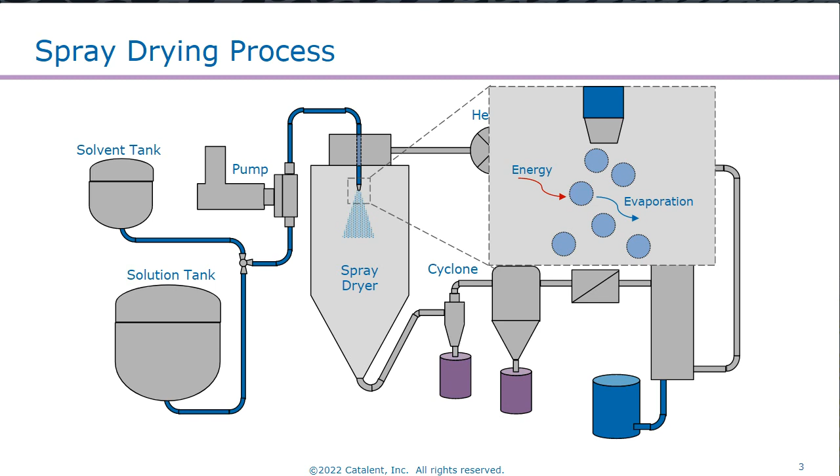Thinking about the early phase of development. In general, in this phase, companies are looking to achieve suitable exposure of their drug in initially tox studies and subsequently clinical studies. We want to assess the safety of the drug, getting up to potentially quite high doses. We want to see some initial signs of efficacy, and often a big driver is to get to the clinic quickly and with limited API.

So if we're developing a spray-dried amorphous solid dispersion presentation for the drug in this phase, some of the considerations here: the SDD is often being used to improve the solubility of a poorly soluble drug, and through that improvement in solubility, it's driving the improvement in bioavailability to help achieve the exposure in tox and in the clinic. In order to do so, we need to identify drug polymer combinations that provide the enhanced dissolution, so that we are getting that improved bioavailability.

We also need good physical stability for the drug polymer combination, and ideally we want to be operating at a high drug load. The higher the drug load, the smaller the dose will be for a higher dose of drug.

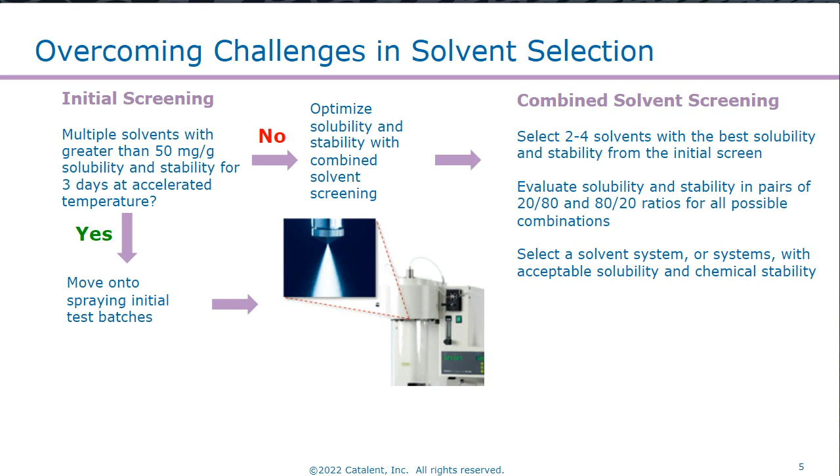So from the initial screening, we'll look at a few of the solvents that are showing the best promise, and start to look at combinations of those solvents, potentially 80-20, 20-80 ratios. And then when we find a system that does have acceptable solubility, we can then proceed with the initial spray drying.

Some of the common solvents that we'd be looking at here: we're often using alcohols, so methanol, ethanol, isopropanol, often ketones, so acetone, methyl ethyl ketone, methyl isobutyl ketone. Chlorinated solvents such as dichloromethane have great utility here. They're often very good at solubilizing both the drug and the polymers that we're working with, and then sometimes solvents like ethyl acetate.

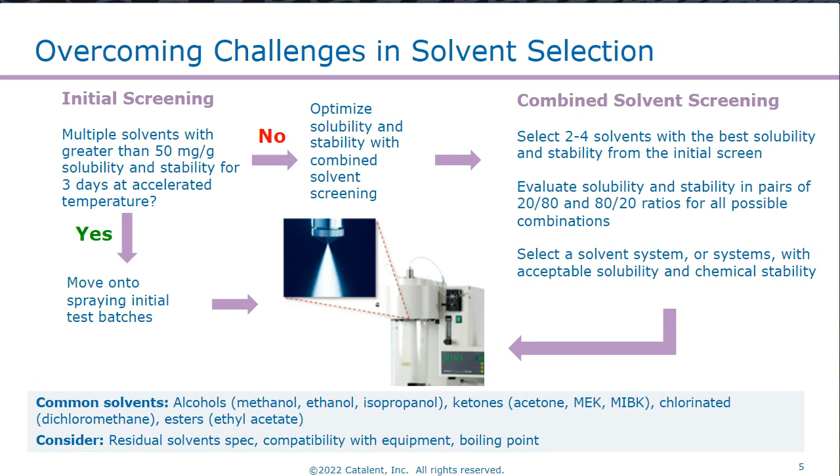Key considerations in the solvent selection are thinking about the residual solvent spec that we're going to need to meet for the finished product, which of course is related to the toxicity and tolerability of the solvent. We also need to consider the compatibility of the solvent with the spray drying equipment. Some of the more aggressive solvents that we may look at to dissolve the API may also be very good at dissolving some of the seals that we have in the spray drying equipment. And of course, the boiling point of the solvent will also be important when we're establishing the spray drying conditions that we're going to be using.

So that covers where we go with the solvent. The other part of the solid dispersion is the polymer. So some approaches that we take to determine which polymer we're going to be using: there's broadly two aspects that we need to consider.

The first part, we need a polymer that is going to be stabilizing the amorphous state of the API, because we're normally using the amorphous state of the API to improve solubility to get the bioavailability enhancement. So one of the first parts of the screening is to look at combinations of the drug with different polymers at different drug loadings to see which combinations can produce amorphous films, and then through stressing those on stability, which of those can remain amorphous on storage.

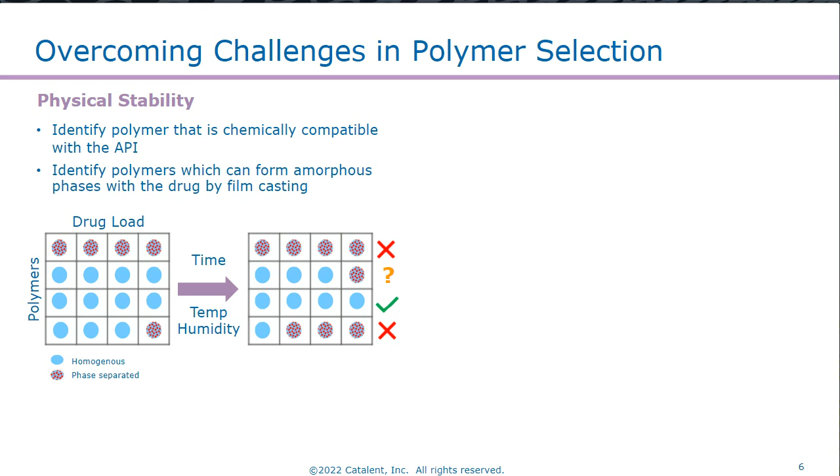The other important aspect is whether the polymer can maintain the supersaturation of the drug following dissolution. In other words, when the solid dispersion releases the drug on ingestion in the intestine, which polymer will maintain the solubility of the drug at an elevated level.

There's a screen we use routinely here, a liquid-liquid phase separation screen, using fiber optic microdissolution equipment. In the dissolution medium we have the polymer pre-dissolved at a known level. We then titrate the drug into the dissolution medium, dissolved in a water-miscible organic solvent at a high concentration, and through monitoring the UV response and scatter of the UV trace, we can determine when the drug comes out of solution.

By identifying where that separation occurs, we can determine how much polymer is required to maintain the drug in solution. From a combination of those two experiments, we can determine which polymers at which drug loads are going to be physically stable, and which are going to maintain the supersaturation. So we can identify which of the polymers are worth spray drying.

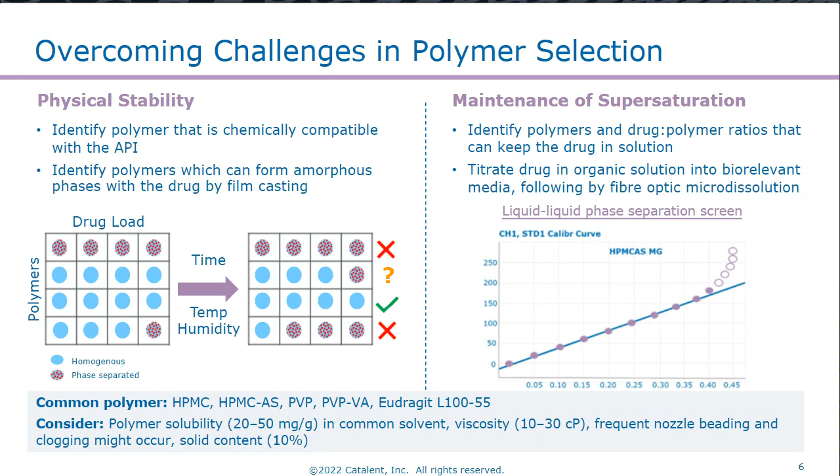So that gives us the initial leads that we would be considering in the lab. Through preparing some of those via small-scale spray drying and characterizing the solid dispersions, we'll select which of the solid spray dried dispersions we're going to scale up for phase 1 clinical supply.

At the lab scale we would determine the solids content, and then through the use of a single spray solution preparation, we would explore different process parameters such as the inlet and outlet temperature, the choice of nozzle, the atomization pressure, the feed rate, and the interrelationship between these parameters. This gives us an idea of the processing parameters we need to operate with for these initial clinical manufactures.

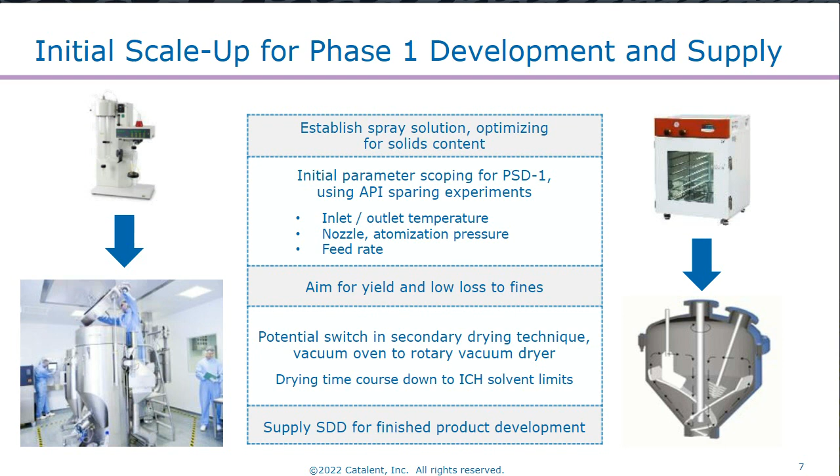As we transition from early phase clinical manufacturing into late phase with an eye on commercialization, three common goals tend to crop up with project teams. The obvious one is we need to increase production capacity. Along with that often comes the need to optimize critical quality attributes to make the best finished product dosage we can. And as we get ready for increased regulatory scrutiny, we need to find and manage sources of risk within our product and process.

Three ways we look at doing this: use science and experience-driven scale-up methodologies, useful for scale-up, de-risking scale-up, and for better troubleshooting when things go wrong during manufacture. At this stage we also need to start linking material attributes and process parameters directly to the product quality attributes we desire. Throughout all of this, we should be doing risk assessments with the whole project team—analytical, QC, operations, and development—to find and manage those sources of risk.

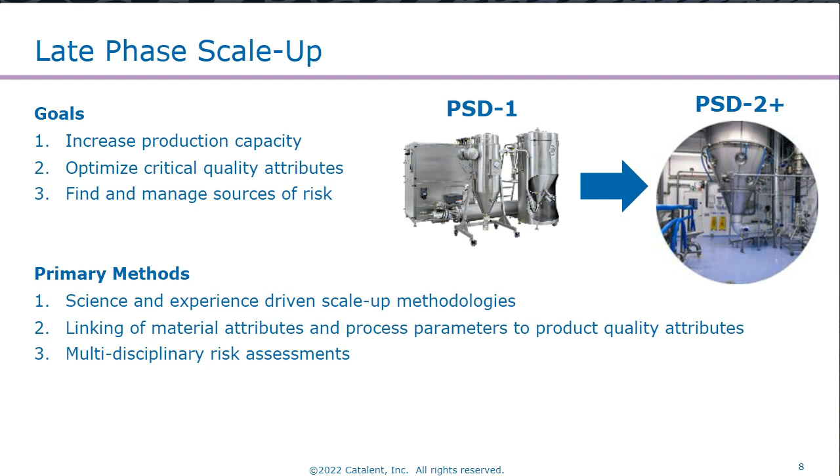It's helpful to have an understanding of the scale of dryers we're looking at. Early feasibility studies are often done with rather small dryers—your Büchis or your ProCepTs. The gas flow is slow, and they're typically run in open loop, meaning we don't recycle the nitrogen during spray drying. We have drier processes overall. These are also done with two fluid nozzles, where we have limited particle size tunability.

You'll often have very fine particles, and you need to be careful to ensure those are dry before they impact on the surface. As we move into phase 1 and pilot scale batches, it's often a time where we transition into closed loop recycle nitrogen, so we need to keep an eye on how that impacts the relative saturation of solvents at our dryer outlet. We're also switching to high pressure nozzles, so we have to be careful about how we select that nozzle to ensure we're creating droplets of the right size for the particles we want.

Late phase, we're often looking at switching to production or even very large capacity scale spray dryers. These dryers have large drying volumes, which allow us more flexibility with the way we're using our nozzle to create droplets that are larger and dry slower because they have more time until they impact onto the wall of the spray dryer or outlet piping.

It's important to note that spray drying processes done at feasibility scale produce powders highly representative of what you're producing at larger scales. Physical chemical properties of those powders are going to match. Things like your Tg, which is important for the development of oral dispersion products, are going to match if your formulation matches.

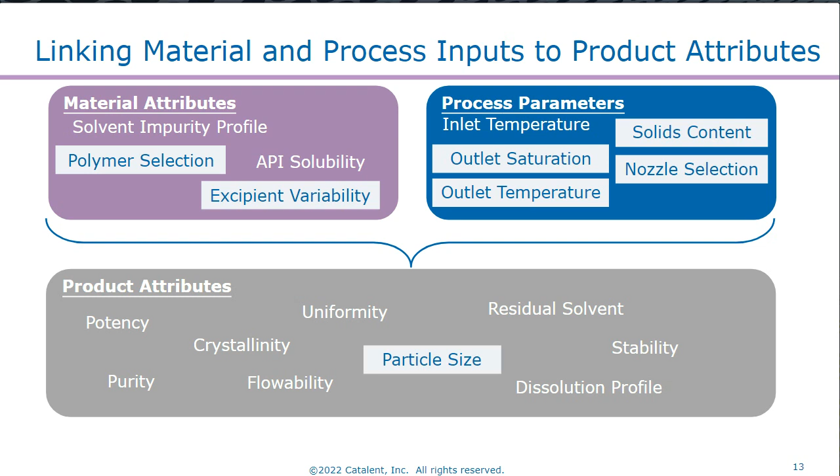In late phase development and troubleshooting, we often need to understand at a really detailed level the way that process parameters impact our product attributes. During early phase, this is accomplished with rules of thumb. Over the experience of spray drying, you learn, and with thermodynamics, understand how changes in process parameters are expected to impact your product attributes. As you develop, you get more product-specific observations from batch to batch.

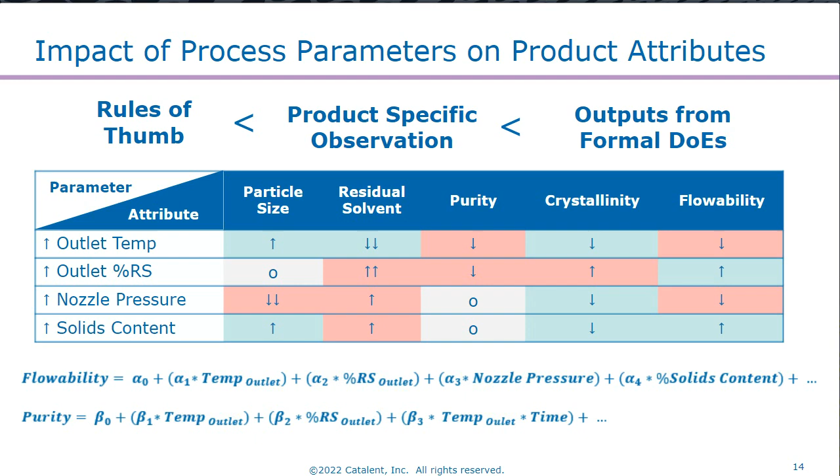Another tool that we often use is risk assessments, and there's two key uses of these. They help us prioritize where to invest our resources, and they can be used as documentation for a quick reference during troubleshooting. This helps both the operations and development team communicate clearly what to look for during these scale-up batches.

The most basic form of risk assessment I like to use is a simple risk ranking, where you look at the severity of a risk and the likelihood of it happening, and that gives you a risk level, which can be used to prioritize where to spend time and how much control we need to have over ensuring that risk doesn't happen. Some high-risk examples would be things like API degradation in solution.

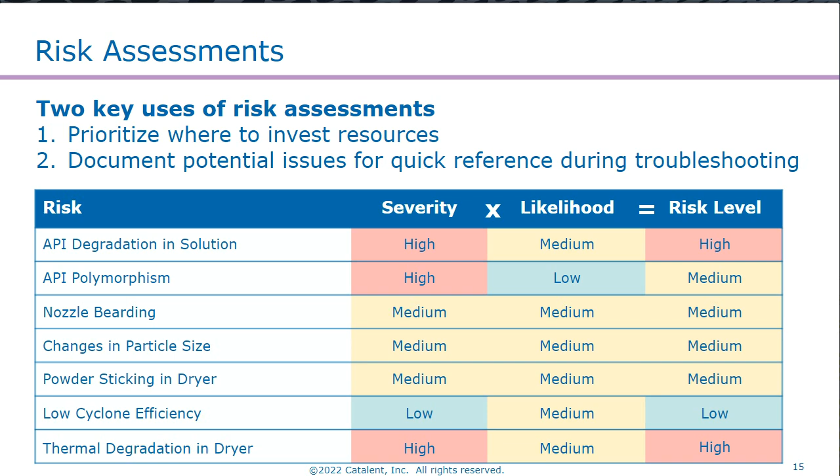This could cause out-of-spec product which couldn't be released, so we need to have a high degree of control over things like this. A lower impact example would be low cyclone efficiency. The severity of this is usually low, provided that we can still meet the clinical supply, and the likelihood is medium. Usually at this phase, we have a good understanding of what is driving our yields, and we can control it. So in this example, we would spend more of our effort making sure our API doesn't degrade in solution versus worrying about our cyclone efficiencies.

Another useful tool during troubleshooting is to create these sorts of troubleshooting guides for project teams and the operations team, where we can have issues, causes, diagnostics, and solutions for these potential issues. So going back to our API degradation in solution example, what are some causes of this? We could have, from early phase, selected a solvent where there is some slight incompatibility with the API.

Perhaps our API is sensitive to hydrolysis reactions, and a solvent blend was selected that contains water. This could have been done at early phase because it was the best option we had available at the time to get the solubility we needed, but it does expose the project to the risk of that hydrolysis reaction. Another couple of potential causes are perhaps as we scale up, there was a change in how the API is exposed to light or oxygen.

Some useful diagnostics for this are clearly our HPLC solution assay and related substances methods. And then we should give our operators and scientists instructions to look for color changes in the solution. That's often a very early sign that something is going on in your solution.

Some ways to address this are really formal solution stability studies. These should be performed throughout product development as we change scales and change the time and conditions we're holding our solution in. Another thing that's often useful to consider for late phase development is changing the way you hold your solution, perhaps looking at holding it at 2 to 8C versus room temperature, particularly if you anticipate long spray drying times and need to be covered against potentially weeks of API in the solution state.

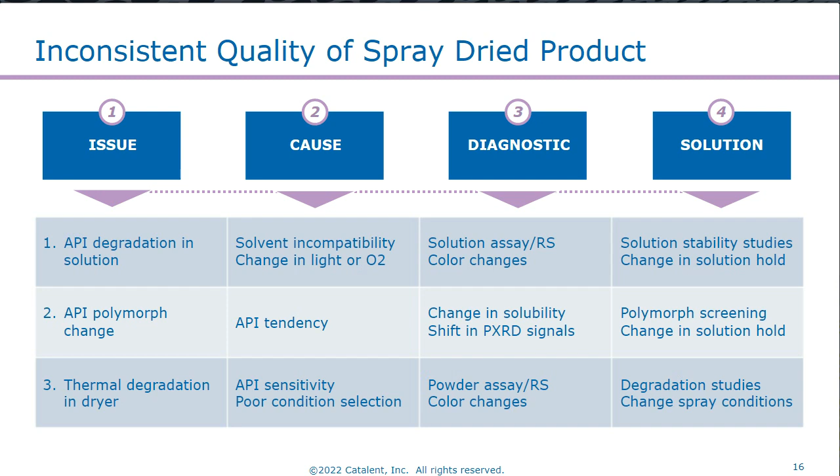Another common set of issues is material processability. Spray-dried powders are known in the industry to have issues with flowability, and that product attribute of the spray-dried intermediate needs to be controlled and troubleshot during scale-up. This poor flowability comes from the generally low bulk density of these materials and the small particle size. The diagnostic of this is physical characterization and then downstream experience.

You need your spray drying team to be in communication with the team developing the solid oral dosage form to understand how impactful this poor flowability is on their ability to produce the material. Some ways we can address this with the spray drying process is to optimize our atomization to create larger droplets, changes in the dryer settings to create denser material, and looking at improving our spray drying solution and perhaps increasing the solids loading if we can.

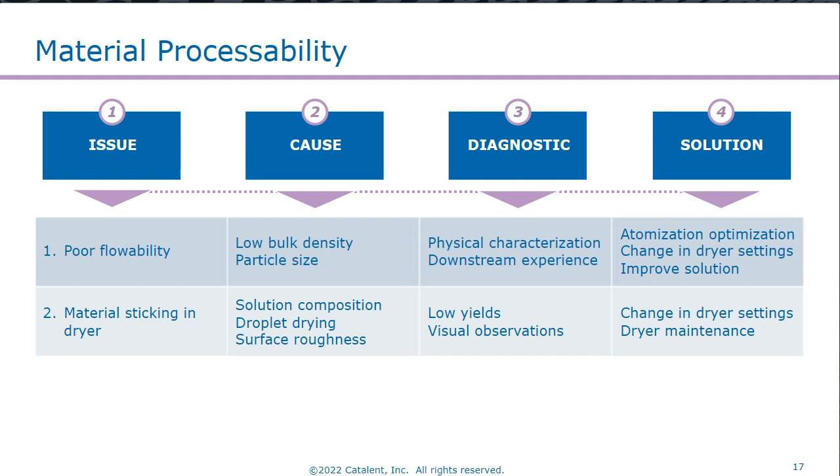Some equipment-driven troubleshooting issues is that low cyclone efficiency. This can be caused by an improperly sized cyclone. Perhaps we're pushing process throughput and we're now operating in a regime that the cyclone wasn't originally designed for. Perhaps we're creating a lot of fine powder. Or one that often creeps up is if you have material sticking on the wall of your chamber, and then if your pneumatic hammers knock that material off, you can clog or overload your cyclone.

Some ways to diagnose this are ensuring you check the design calculations of your cyclone, creating larger droplets to create larger particle sizes. And if you see cyclone clogging, the most common diagnostic for this is you'll have collection container yields of 90%, 90%, and then suddenly you'll have a collection container yield of 50%. This can often be diagnosed by also pressure monitoring around your cyclone. If that pressure drop changes, you know that something has changed in the physics of that cyclone.

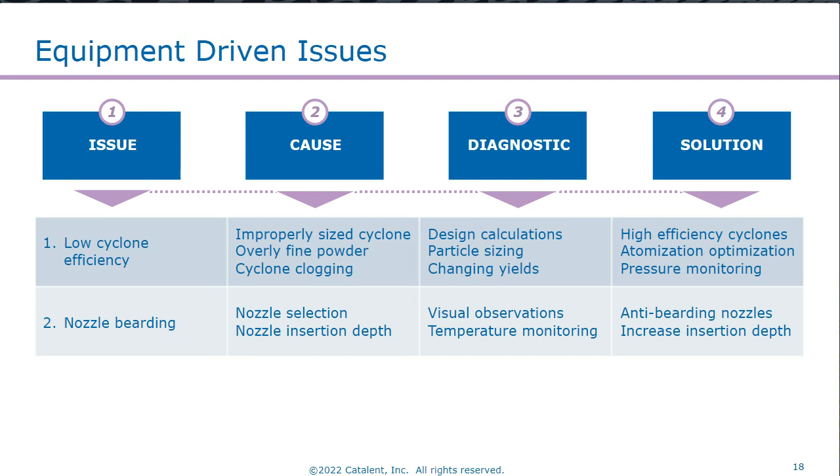Now I'm going to walk through a specific case of some troubleshooting we saw during tech transfer of a batch from the PSD1 scale to the PSD2 scale, where we had no historical observations of crystallinity in our spray-dried powder until this batch.

There were a few initial hypotheses on what had happened. The first one was incomplete API dissolution. An issue we have with this hypothesis is that it's really difficult to assess post-manufacture. Once that material's been sprayed, we can't go back in time and assess if it was fully dissolved in the solution. A few things we had in place to de-risk that were visual confirmation of dissolution.

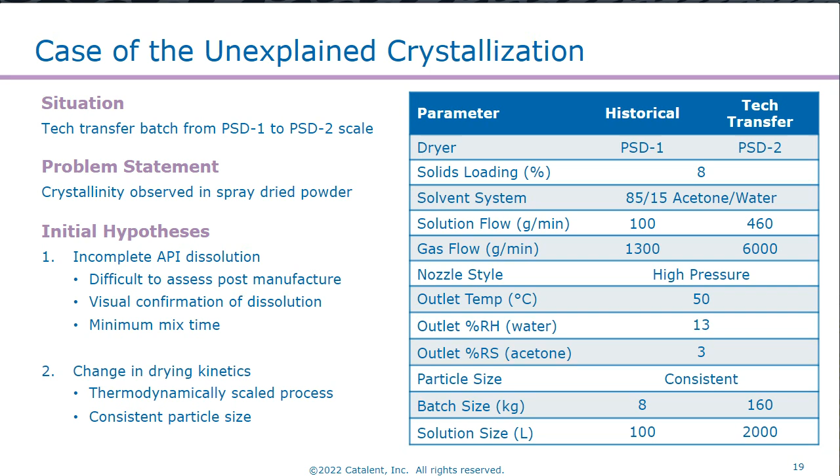The operators observe the processing tank and ensure that it's a clear solution, and a minimum mix time was in place. The other hypothesis was that perhaps during this scale-up, we changed the drying kinetics of those droplets. This wasn't likely, though, because we had a thermodynamically scaled process and consistent particle size, meaning likely consistent droplet size between the batches. What I will draw your attention to is at the bottom of the table, we had a fairly large change in batch size and solution size, which led to what we eventually identified as the root cause of the issue: a change in our collection container size.

Historically, on the smaller scale dryer, we had been using 10-liter collection containers and changing them out every 3 hours. At the larger scale, we were using 100-liter collection containers and changing them out every 7 hours. This change in size and then separation from the process by double flap valves led to a change in temperature in the collection container. This change in temperature actually leads to an increase in the relative saturation of those solvent vapors, being the water and the acetone, which is known to plasticize the spray-dried dispersion.

So our materials in the collection container for our tech transfer batch would have had a much lower TG relative to what we had seen historically. That lower TG leads to plasticity, which can lead to API crystallization.

The ways we mitigated this after we had identified this as the root cause were to reduce our container size, increase the frequency at which we change those out, and then a major one was the implementation of a dry nitrogen sweep. So you can sweep the headspace of that collection container to remove that solvent vapor so that you're not plasticizing your SDD as it sits in that container.

An additional one that we assessed and didn't actually move forward with was reformulation. I think it's important during late phase troubleshooting to understand that there are things we can change about the formulation and the process. Particularly in this case, we were looking at reducing the amount of water in the spray solvent, as that's often the material that's most sensitive to changes in temperature, changing the relative saturation in your outlet and collection containers.

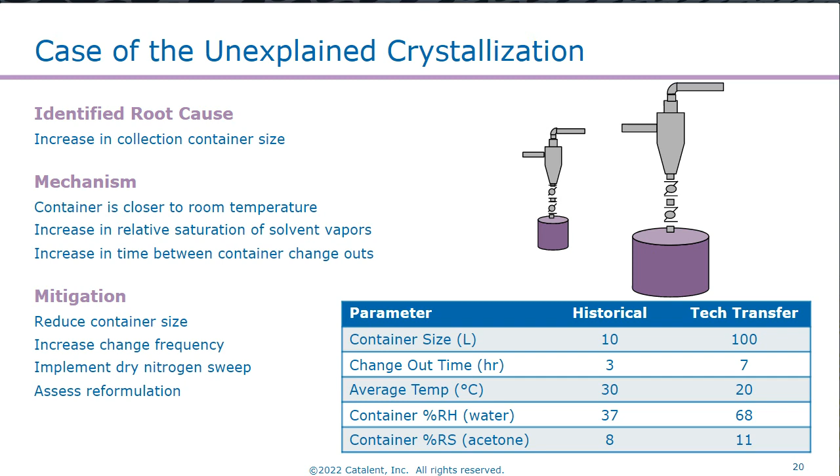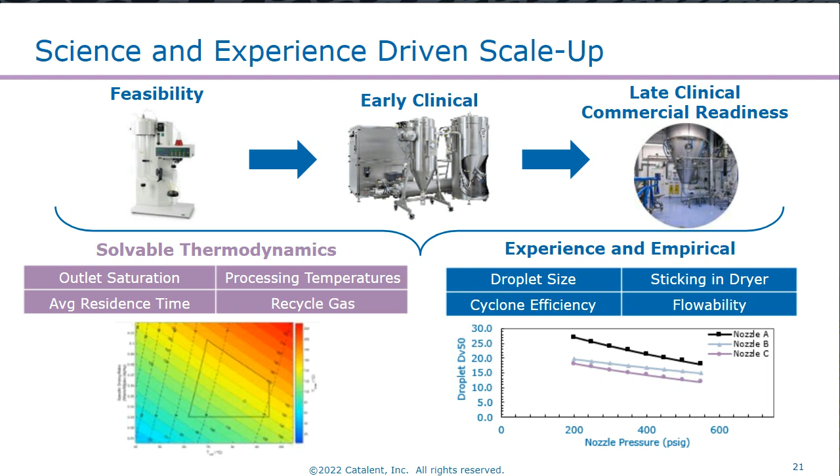So through all of this, I really like to link back to that scale-up and troubleshooting needs to be science and experience-based. We have available to us tools that solve the thermodynamics of the spray drying process and a load of experience for how to scale up these processes from feasibility to early clinical and then get ready for commercial readiness.

That's part of our offering at Catalent for our end-to-end spray drying technology. At the development stages, we have full on-site analytical characterization and method development. These teams often do our pre-formulation testing where we select which polymers and solvents are best for the spray drying process, and then transfer that to our process development team to get the initial spray dried powders available for in vivo studies in animals and clinical readiness. We have the capability to process with organic and aqueous solvents and potent and non-potent molecules.

We have sites that are specialized in R&D and GMP manufacturing, covering that early feasibility through phase 1 to 2A of development. As part of our integrated service offering, we also have scale-up and commercialization, where we have in-house formulation and process expertise as we look towards those large production capacity dryers. Having that in-house allows us to have more direct communication between the early development teams and late-scale development teams.

For GMP manufacturing, really looking at that phase 2B through commercial readiness. These sites do have scales of dryers appropriate for those low-volume orphan and pediatric products, all the way to large-scale blockbuster products. Thank you for your time and attention during this section.

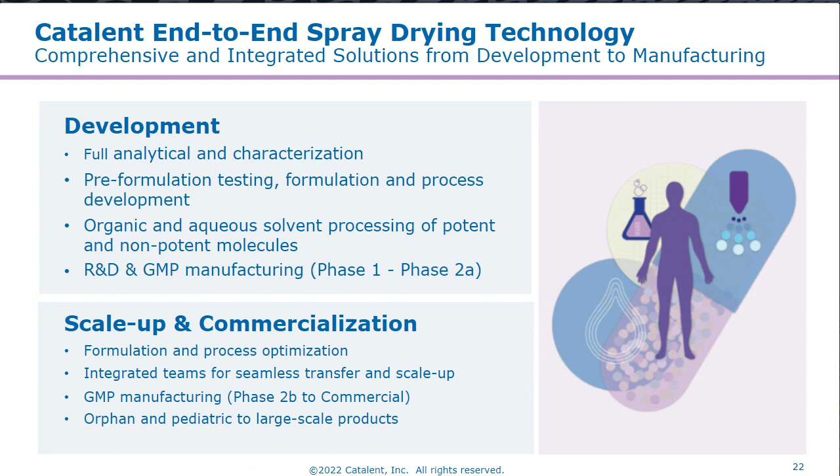Thank you very much, Thomas and Matt, for a really nice talk. I will now land on a specific application of spray drying for lipid-based formulations. Based on our experience at RCPE, I will walk you through the challenges and general limitations when spray drying lipids. And of course, at the end, I'll provide some solutions and a strategy of how to overcome this.

Before jumping actually to science, let me give you a couple of words about RCPE. RCPE stands for Research Center Pharmaceutical Engineering. We are a non-university independent research company in the field of pharma, process, and product development. We are located in Austria, in the city of Graz. Currently, we are 150 employees coming from more than 20 different countries, so a very international team that we are. What we do is to support pharma industry in understanding process and product design at early stage drug product development, and we do this through service projects and long-term collaboration with pharma industry.

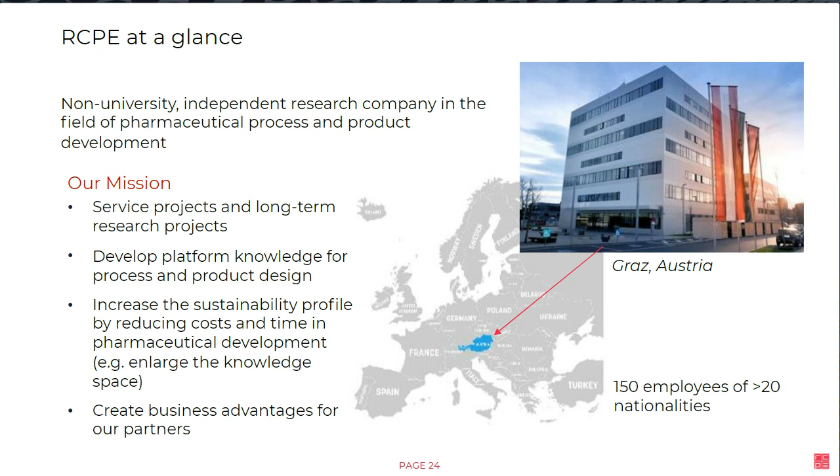For my talk today, I will first give you some generalities about spray drying of lipids, what we know so far, especially hurdles and limitations. Then I will walk you through some rational process design for lipids, for spray drying of lipids. And basically, at the end, I will just give you some examples of how successful these strategies can be with some case studies. So let's start with spray drying of lipids, some hurdles.

First of all, let's understand why we would like to spray dry lipid-based formulations. Well, lipids as excipients can be very beneficial materials for drug delivery. They are coming from natural sources, and because of that, they offer a very good biocompatibility and low toxicity in the human body. Of course, they can provide as well different functionalities to the final dosage form, such as enhanced drug bioavailability down to taste masking, for example.

The problem comes when we want to spray dry lipids. These materials are often very complicated for spray drying. They are characterized by extremely low yield, even below 20%, wall deposition, sticky products, and many of the issues that Thomas mentioned already are very much expressed for lipids.

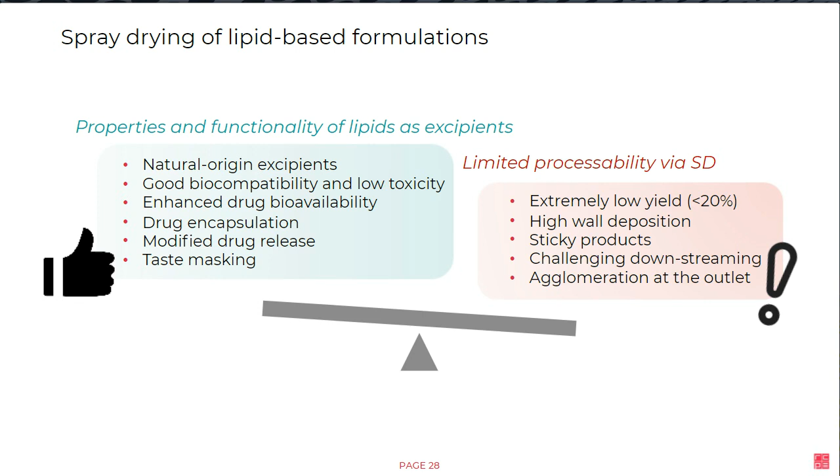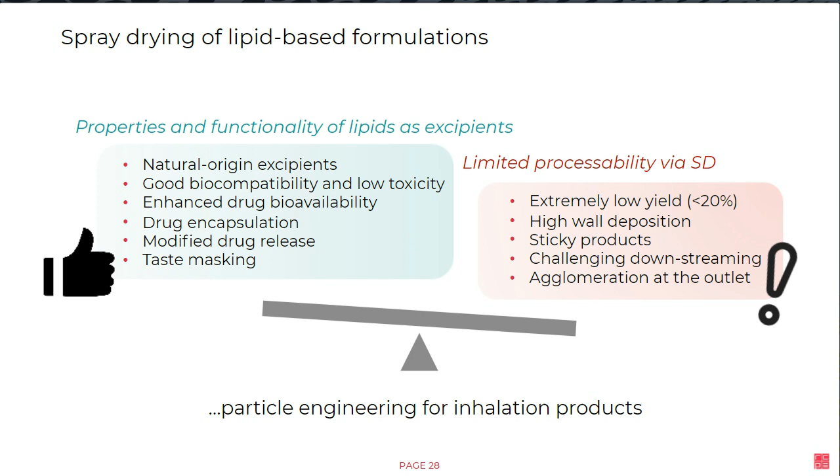So to this point, you will wonder then why we would use spray drying for lipids if it's quite complicated. Well, the answer is quite short and straightforward. By spray drying lipids, we can provide effective particle engineering for inhalation products. And this can vastly improve the performance of conventional and inhalation products. I will go a bit into details on this point, lipids for inhalation.

We are talking about providing dry powders for inhalation, or DPIs, which are free of large carrier particles. They are called carrier-free DPIs, and compared to conventional carrier-based DPIs, they can offer a lot of advantages for patients.

Looking at the performance of conventional carrier-based DPIs, they are composed basically of micronized drugs blended with a carrier with larger particle size, basically lactose, which is the most common carrier for DPIs. This blending step is made to provide better flowability and better aerosolization performance.

Then the DPI is inhaled by the patient, and in this aerosolization process there should be a detachment stage in which the large carrier particles are separated from the micronized drug. The idea is for the drug to reach lung deposition and actually reach the stage of the lung we want to target. However, so far the performance of these conventional carrier-based DPIs is not optimized.

It is known that 40 to 85% of the dose is not delivered to the site of action. This is either due to it staying in the inhaler device, or it's simply not properly detached, meaning the micronized drug stays in the upper tract and is simply swallowed. So at the end, an average of only 40% of the drug actually reaches the site of action.

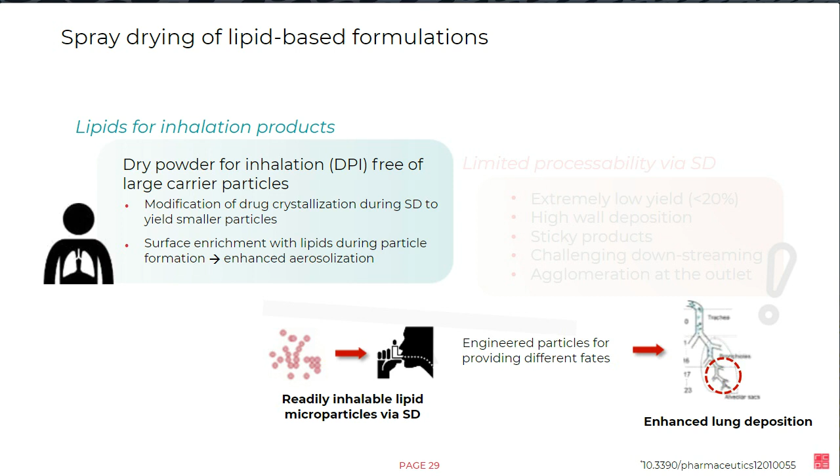I think so far I've given you enough reasons to face this limited processability of lipids by spray drying, and to understand why, and to try to give some rational solutions. Why is the processability so limited?

Well, there is one main reason, which is the low melting temperature of lipids. This is a problem in relation to the outlet temperature during spray drying. Although this is the most important reason, it's not the only one, unfortunately.

Lipids are also complex materials composed of multiple phases, most having different melting temperatures, which can create phase separation during spray drying. Also, other lipid crystallization pathways such as polymorphism may affect processability by spray drying.

Anyway, lipids have been used in the industry, and the solution given so far is to include additional solid formers in the feedstock for spray drying, meaning salts, sugars, or polymers are mixed into the solution for spray drying, and this increases the processability of lipids.

However, there are disadvantages such as dose dilution. We cannot reach the highest dose possible because of the dilution effect of extra excipients, and of course more complex formulation development with more materials included.

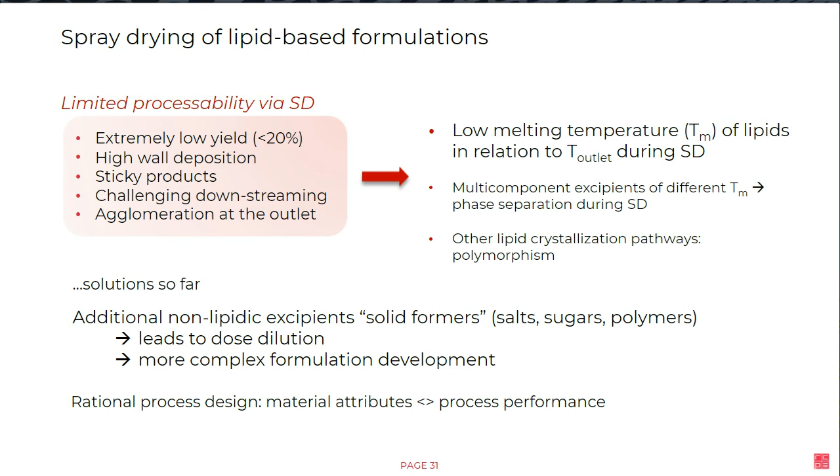What we want to show you today is how a rational process design, combining critical material attributes with the process parameters engaged with the process performance, can give us a simple formulation completely based on lipids with a high yield. So let's go to this rational process design.

The strategy we propose might seem simple. First, select lipids with the highest melting point possible; this will facilitate the process a lot. Then run a pre-formulation step in which we check any kind of interaction, drug or solvent with the lipids, that might impact the melting point of the formulation, and inspect any other transition. Based on these findings, we can fix a boundary for the outlet temperature of the spray dryer.

The question so far is: okay, this strategy looks quite simple to follow, but is that enough? Or more directly, is that applicable for any kind of lipid? Well, let's see now—I will show you some case studies where we will prove this concept.

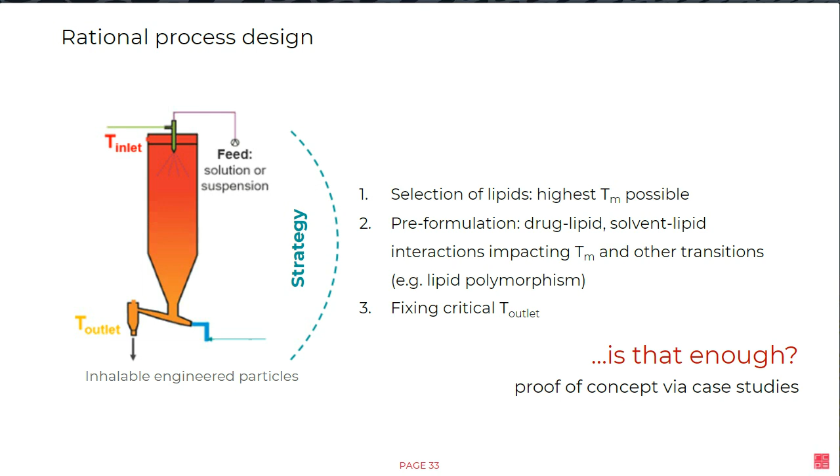In these case studies, what I want to show you are two different particle attributes that are supposed to provide different drug delivery applications. We want to provide totally lipid-based formulations, with no additional excipients. The two examples I have here are: the first one is for the systemic delivery of analgesics.

For this part, we need a DPI, a dry powder that is dispersible without the addition of carrier particles and that is inhalable, meaning having an aerodynamic size between 1 and 5 micrometers. When the particles are finally deposited, they are expected to diminish clearance by macrophages as much as possible in order to deliver the drugs via systemic absorption.

On the other side, we have another case study, in this case for targeted delivery to alveolar macrophages. Here we have slightly different particle attributes, and the most important difference is that the particle after deposition should be enhancing or triggering phagocytosis in order to have a targeted delivery inside the cell and deliver the drug inside.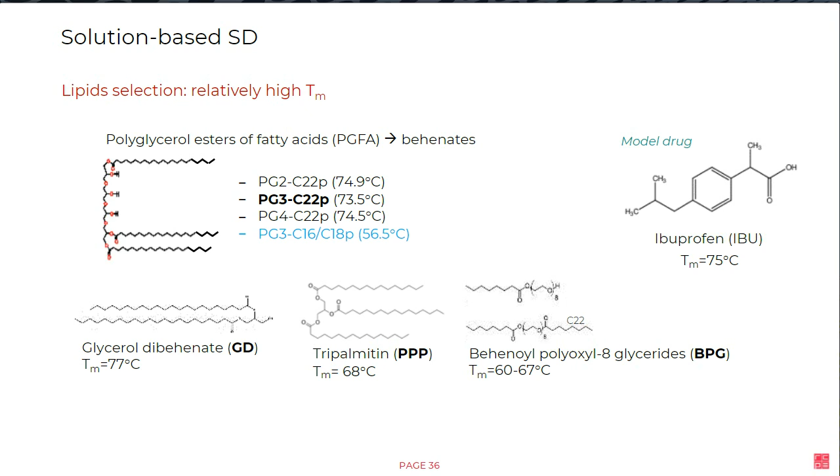I'm also showing here an example of a PGFA in light blue with a relatively low melting point. This is a comparison of how important it is to provide a relatively high melting point for lipids. The other materials are glycerol dibehenates, tripalmitin, and behenoyl polyoxyl glycerides, which also have high melting points, and as a model drug, ibuprofen.

For the second part, as you remember, the pre-formulation step was quite important to carry out, and it's a quite easy and fast step. In this case, since we are spraying a solution, a solvent casting pre-formulation will give us a good idea and a prediction of the solid state outcome from spray drying.

So from here, basically, we prepare solutions containing ibuprofen and one lipid, with ibuprofen in different percentages in respect to the lipid. Then the solvent was evaporated and the remaining solid is analyzed by DSC.

I'll show you one example of these findings for PG3, one of the PGFAs I showed you, in combination with ibuprofen. On the x-axis, we can see the percentage of ibuprofen in relation to the lipid, and on the y-axis, we can see the melting temperature.

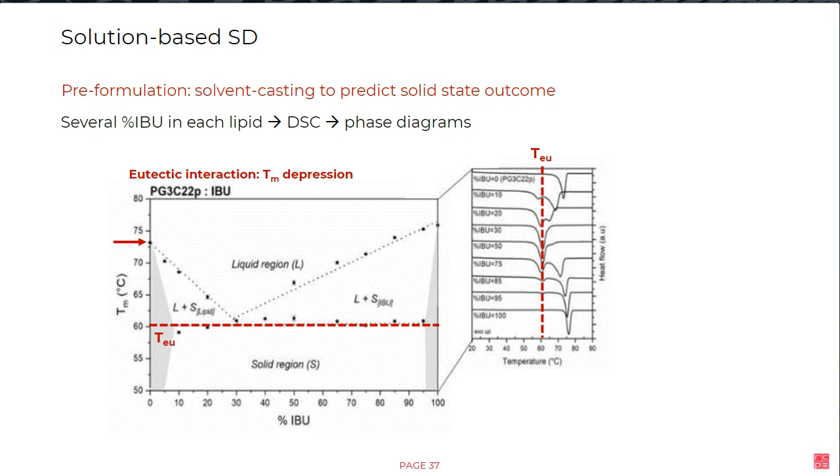The very clear observation here is that even though these lipids have a high melting point, like around 74 degrees, any kind of interaction with ibuprofen will immediately drop the melting point of the mixture. What we are seeing here is a eutectic interaction between these two components, characterized by melting point depression. Now the real melting point of the formulation is not actually the matrix's 74 degrees, but the eutectic temperature, which is quite lower than 60 degrees.

So the very first observation is, okay, we need to provide an outlet temperature sufficiently below the new melting temperature of the formulation. And how sufficiently below? We will see in the next slide what the recommendation is on that part.

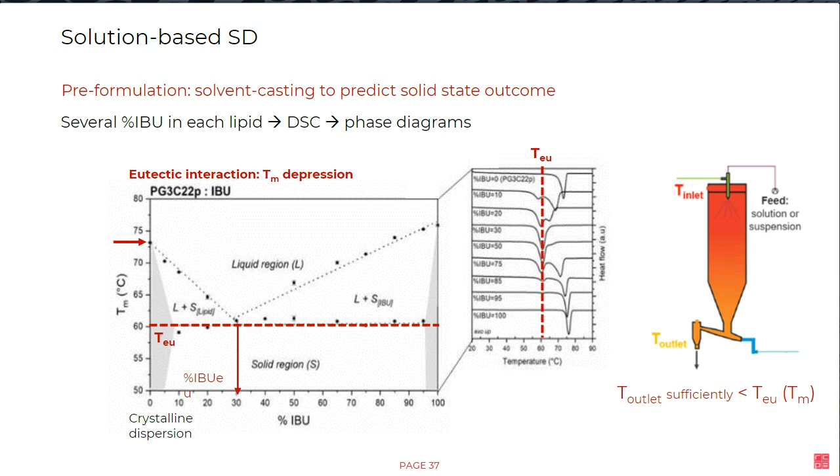Important to mention that with lipids, and especially with this system, what we will provide as a product is a crystalline dispersion. We've been talking about amorphous solid dispersions in previous talks, but in this case we are providing crystalline crystals of ibuprofen dispersing crystals of lipids, so a simple crystalline dispersion.

We do the same with each lipid. We have here the phase diagram in combination with ibuprofen. I won't go through many details, but just to point out that everything in light blue, as I mentioned, we chose this lipid on purpose to show how a low melting point may affect the process. The melting point of the original material is low, and now in combination with ibuprofen it's even lower, down to 45 degrees.

The other lipids either show multiphasic systems, like the one you can see with BPG ibuprofen, where many liquid and solid regions are mixed, which provides a risk of phase separation during spray drying. The rest of the lipids have only one melting temperature, the eutectic temperature of around 60 to 63 degrees, which might still be processable by spray drying. So we use these eutectic temperatures to provide a rational boundary for a critical outlet temperature.

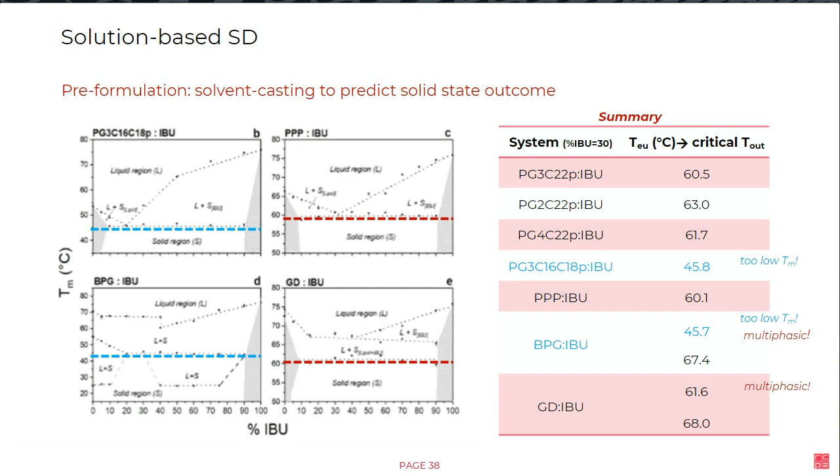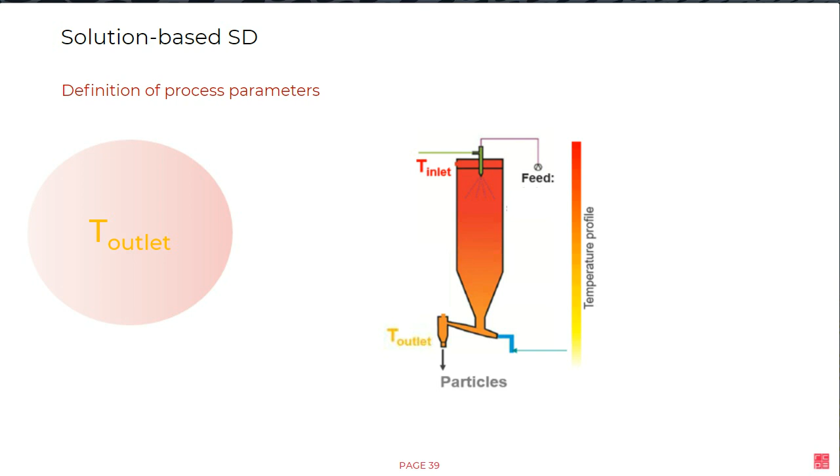Based on this, we can go to the next part, which is to define the process parameters. It's important to know the boundary for the outlet temperature, but the most important part is to provide the target particle attributes that we defined previously in the quality target product profile. For that, we can consider the Peclet number, which is very useful. I don't think I need to go into details on this part.

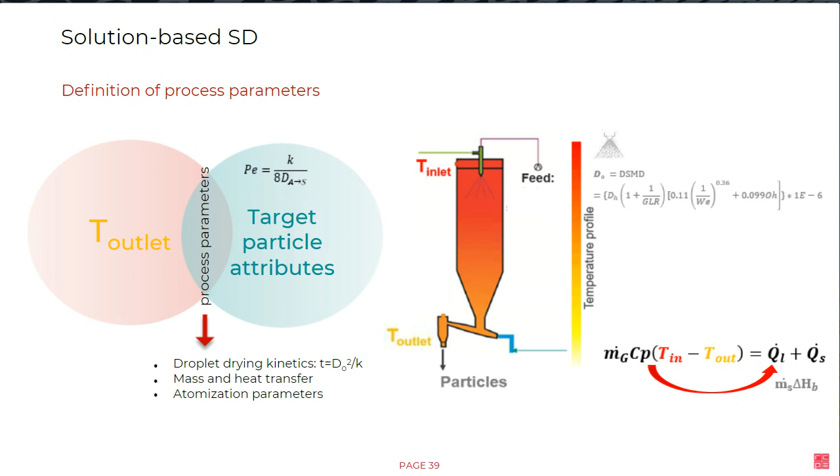Thomas explained very clearly how the process parameters immediately impact the final product attributes. So here it's a matter of screening the drying kinetics, the mass and heat transfers, and so on, especially considering the atomization part, for which we should provide a small initial droplet size after atomization, because we're working with inhalation products. Based on all this, and considering the boundary outlet, we fix some process parameters. I won't show all of them, but important to mention the inlet of 71 degrees.

In this slide I want to show you the process performance of each material. Let's go step by step. I have here two figures, I hope you can see them clearly. In the first figure, we have a comparison of temperature and yield. On the x-axis, we have the name of each lipid in combination with ibuprofen. In orange points, we have the outlet temperature of the system. In green, we have the melting point of the pre-formulation defined previously, and the blue bars are the process yield.

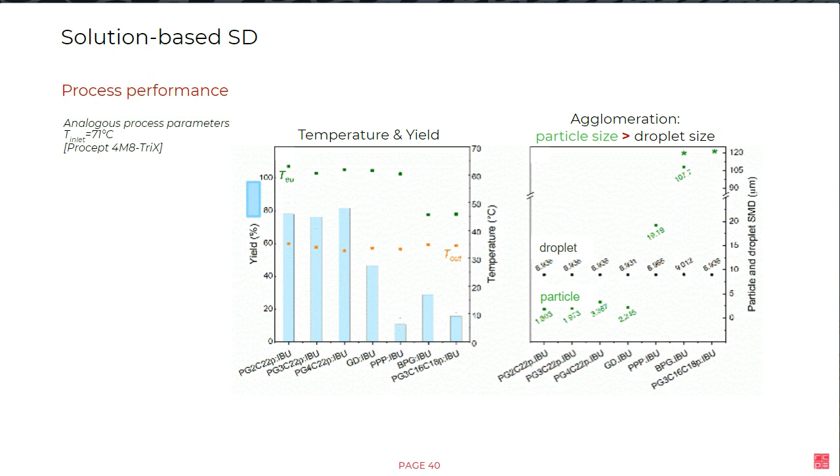In the other figure, we have droplet size, the initial droplet size after atomization, and the particle size of the product at the outlet. We are comparing these two to provide a quantitative idea of the agglomeration at the outlet. When the particle size is actually larger than the droplet size, we can have a sign of agglomeration in the system. Usually it's like that, though there are some conditions where larger, very low density particles are provided. This is not our case here. So this statement of particle size larger than droplet size gives us a sign of agglomeration.

What we are seeing here: first, for all solutions we are providing an outlet temperature of around 35 degrees. For the two lipids with the very low melting point, we have a very close distance between the melting and outlet temperature, which immediately provides a very low yield, even below 20%, and particle agglomeration, as you can see in the figures.

On the other hand, lipids with a melting temperature far from the outlet temperature provided yields even above 80% and no agglomeration in the system. So the first clear conclusion is that at least a difference of 20 degrees should be given between the outlet and the real melting point of the formulation in order to increase yield and reduce agglomeration. This applies to other materials such as sugars, considering glass transition and so on, but for lipids we can establish at least 20 degrees should be given.

Unfortunately, this is not applicable for all lipids. Considering the difference between outlet and melting temperature is not enough for all types of lipids. In this case, for tripalmitin, we are seeing exactly the same thermal conditions, with the same difference between outlet and melting. However, the yield is extremely low, even below 10%, and there is agglomeration in the system. So consideration of the outlet temperature alone is not enough for some lipid systems.

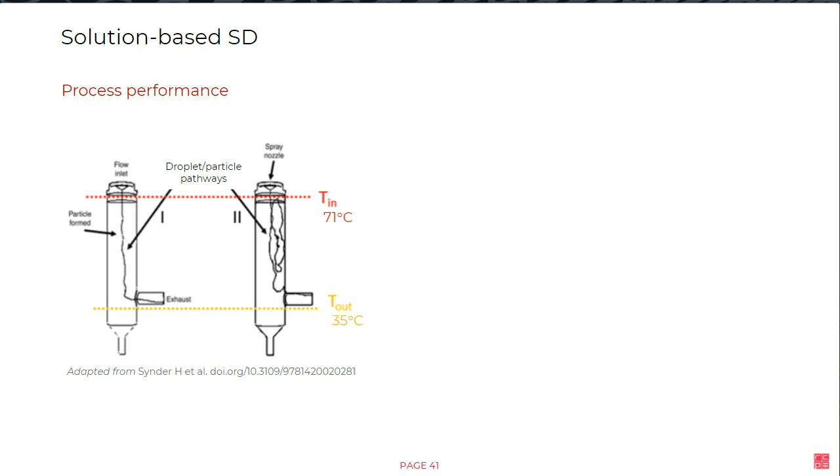The difference between PG3 and tripalmitin, however, is the recrystallization temperature. After the particle is exposed and molten at this higher inlet temperature, it will almost immediately recrystallize and have a very short residence time in the chamber in a molten state, meaning wall deposition and product loss will be negligible.

In the case of tripalmitin, the recrystallization is even further away from the melting point, as you can see. So the existence of molten fractions during drying is unfortunately longer. Also, a fraction of these particles will stay partially molten at the outlet, which will increase agglomeration in the system. So basically, a long residence time of molten fractions in the drying chamber will cause wall deposition in lipids, and these soft fractions in the product vessel will cause agglomeration and impact the yield.

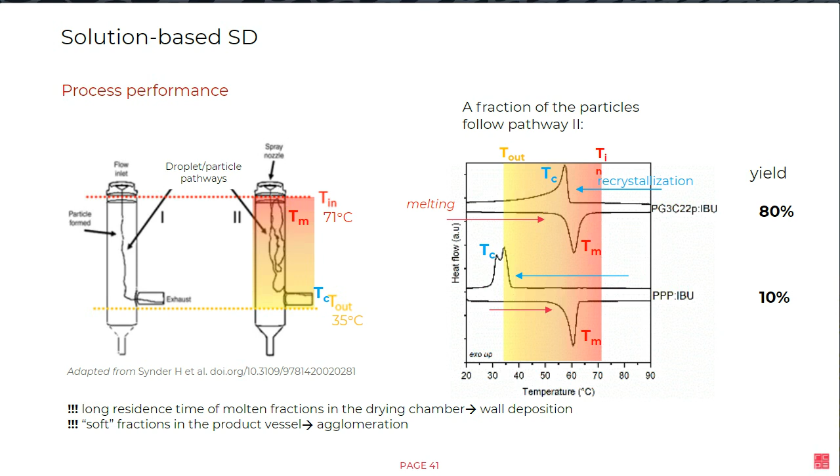I want to point out that it's quite easy to screen using DSC with a pre-formulation, looking at melting temperature, crystallization, and so on, in order to correctly choose the inlet and outlet temperatures. And I want to explain why they have such different behavior between melting and crystallization.

Actually, the answer is very short. Tripalmitin suffers from polymorphism, meaning the beta form with the highest melting point will be molten at the inlet, and then it will try to recrystallize in the alpha form, which has a lower melting point and a lower crystallization temperature. That's why we have such a problematic process.

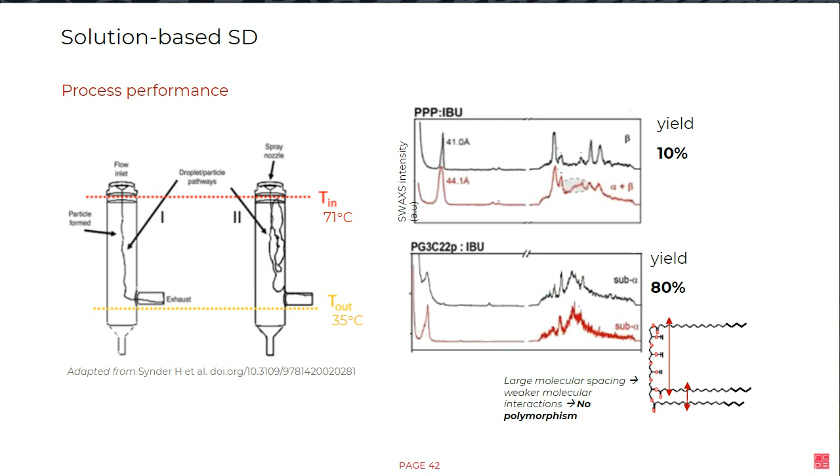On the other hand, PG3 doesn't have any kind of polymorphism, so melting and crystallization temperatures are very close to each other. Finally, we can use this simple DSC analysis to predict issues that might happen, like how close the recrystallization is to the outlet temperature, or the existence of low-recrystallizing fractions in the material.

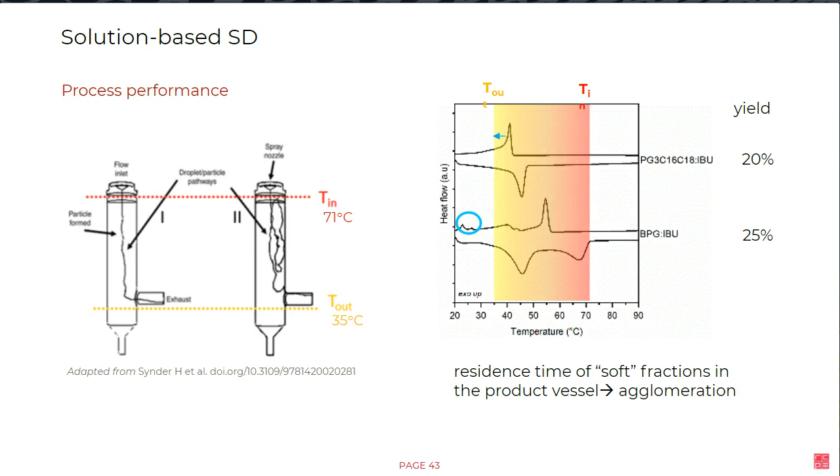To settle down a bit all the knowledge we've gathered so far, what are the critical considerations when spray drying lipids? Well, first of all, definitely select lipids with the highest melting point possible. This will give us a wider, broader design space for spray drying. Run a fast and easy pre-formulation step.

As you could see, this pre-formulation information gave us a lot regarding the prediction of solid state outcome and certain problems that we might face.

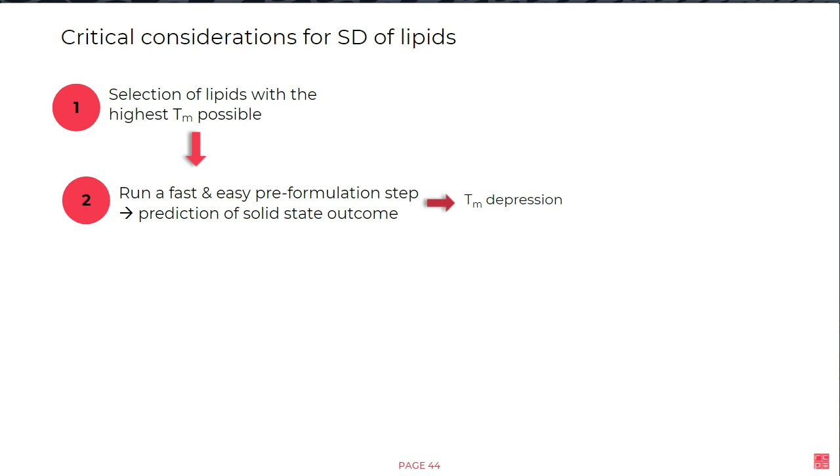If we find there is a melting point depression or polymorphism, we have to set the outlet temperature at least 20 to 25 degrees below the expected melting or recrystallization, and for polymorphic lipids or multiple phases, it is better to avoid melting in the system, meaning that setting the inlet below the melting will be the ideal situation.

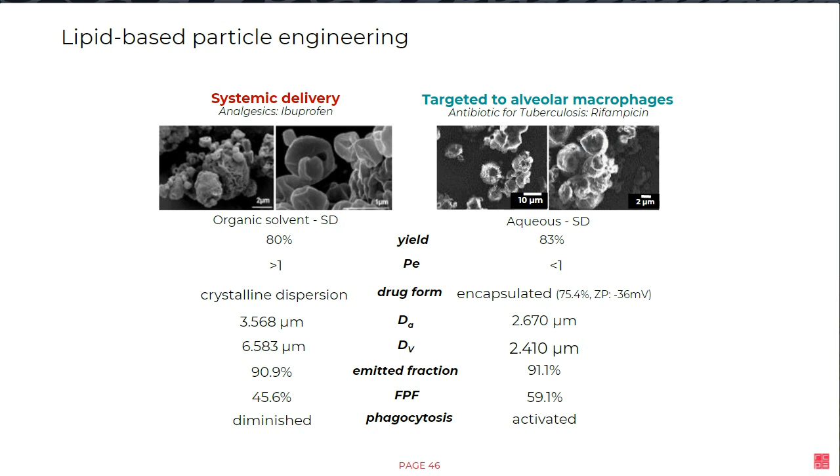And yes, with this, all of these recommendations, we could actually provide completely lipid-based particle engineering without a lot of complications. Thank you very much for your attention, and thank you also for all the institutions that are supporting this work, and to Catalent for this opportunity. Thank you.

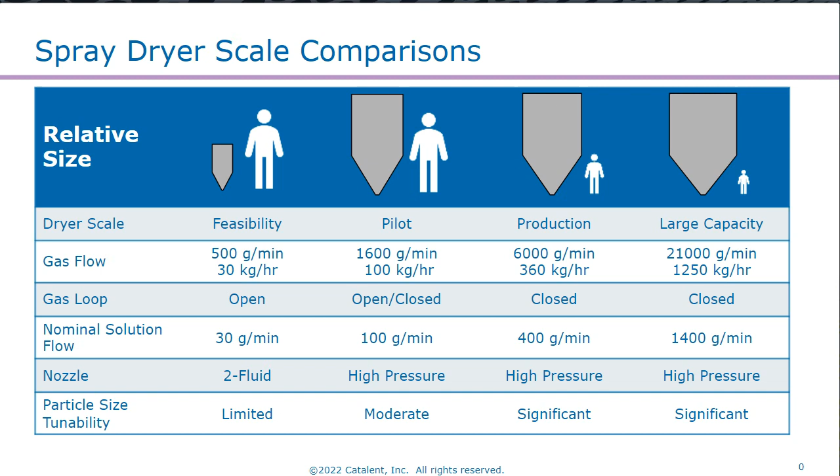The next question is for Matt, and that is: are there any limitations on the choice of solvents for spray drying?

So I think some of the limitations I covered earlier. We need to think carefully about the ability to remove the solvent down to ICH levels. Having the ability to get it properly dry is a very important consideration.

There are also a few solvents that don't have great compatibility with some of the equipment. So we often see problems with the likes of THF, which is often a great solvent in terms of solubility, but it does often cause problems for the seals on the equipment.

The other constraint is the boiling point of the solvent. Though we have been exploring some of the more highly boiling but really great solvents like DMSO and DMF, and have had some success in employing those in at least small-scale spray drying.

Next question is for Carolina, and that is: is spray drying of lipids applicable to other materials that are also complex in their solid state?